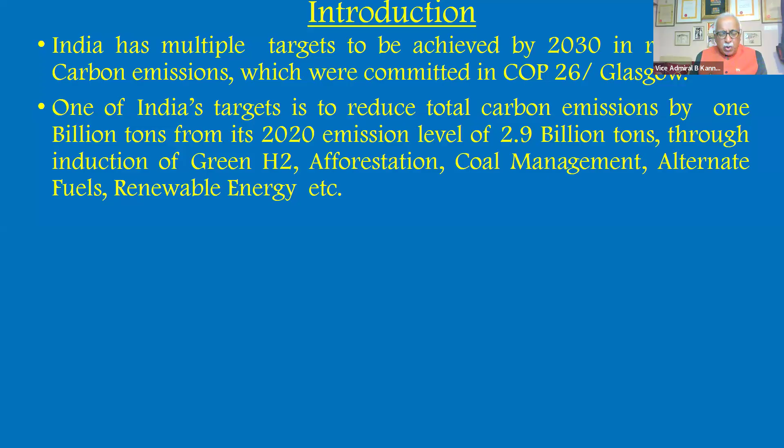The power, industry, and transportation sectors contribute 55%, 25%, and 14% of India's carbon emissions respectively. Power is the maximum at 55%, then comes industry, then transportation. And coal is the major cause of emission in power and industries, not for transportation.

There are hardly any trains running on coal now, hardly any ships running on coal now. So coal's adverse impact is on the power sector and industry sector. One of the major polluting industries is iron and steel, which emits 0.25 billion tons of CO2 every year. Similar high values also exist for other industries like cement, fertilizer, refineries, etc., where coal is used. So wherever coal is being used in industry, you have an issue of CO2 emission because you're burning coal.

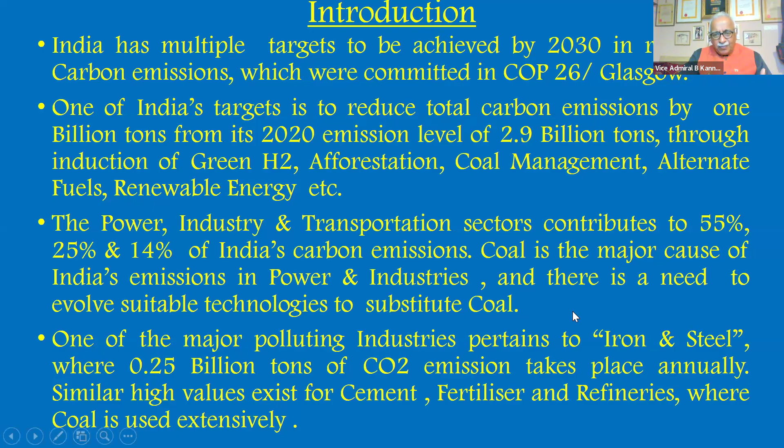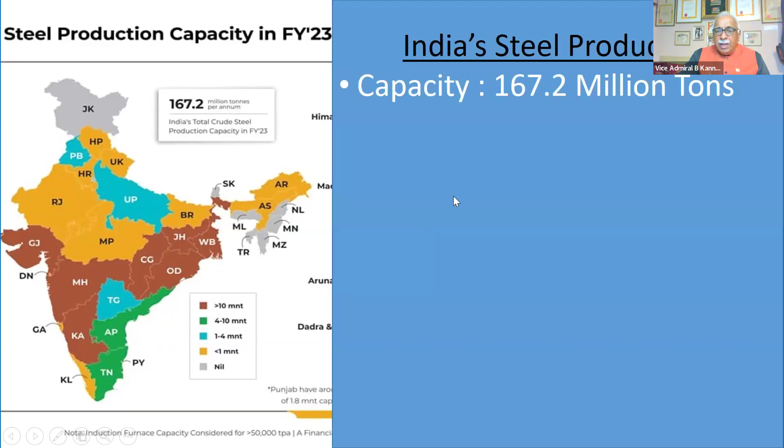And of course, last is gray. We find it's mostly in the central part of India where coal is being utilized maximum for the industries. So for steel production, capacity is 167 million tons, and production last year was 143 million tons. That's close to something like 80 plus percentage.

Private sector is contributing 87% of the production - JSW, Tata's, Mittal, etc. Public sector is only 13%, SAIL, Hindustan Steel. And the world rank for India is number 2, but we are producing only 7.5% of world steel.

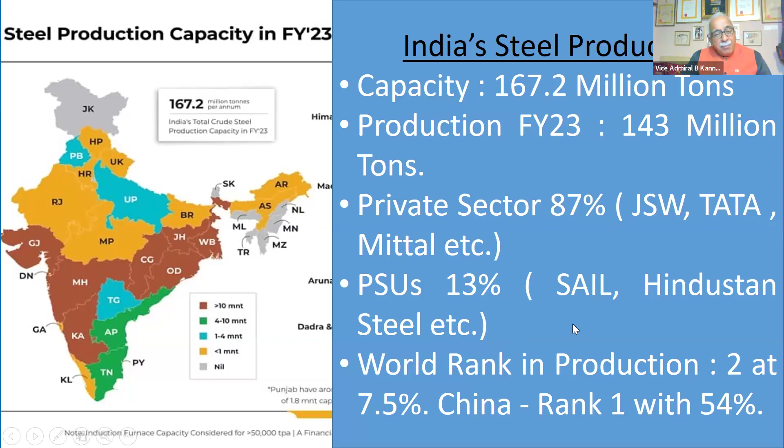China is in rank 1 with 54% of world steel production. They also have lots of carbon emission problems, we'll see in the next slide. But the fact is, they have monopoly over steel production in the world.

So I'm going to show you a little bit of metallurgy combined with some physics. Let's see that. Steel is produced in 2 manners - one is the red circle and the other is the yellow circle. I will explain that very briefly now.

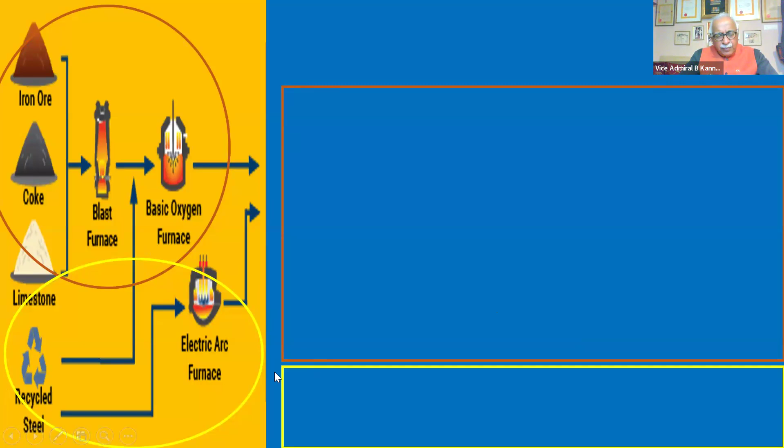In nature, we get steel by extracting it from iron ore. Iron ore is mined from the ground, from coal mines or iron mines, in the form of ferrous oxide, and then we try to get the iron out of it. There's another method, the yellow circle, which is burning scrap steel, collecting it, and recycling it to get steel again. So there are two different ways of doing it.

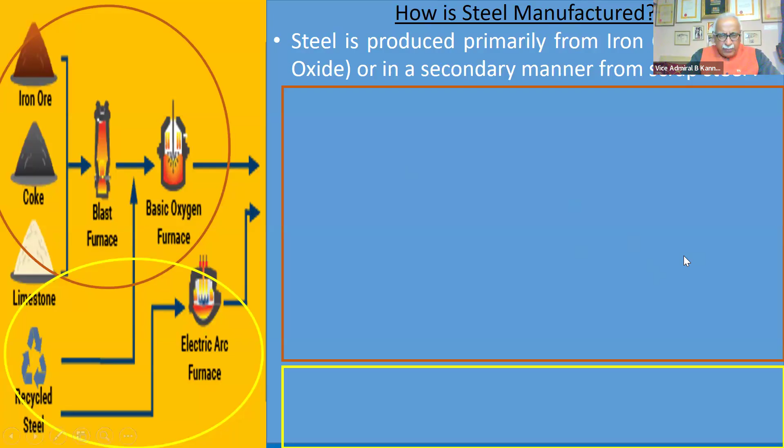Let's go into more details. In the primary method, iron ore and coal or coke are broken down together and fed into a blast furnace. Limestone is also added to help the chemical process, and this blast furnace is fed hot air and oil. That's how the fire is sustained.

Now, in this heat, the iron ore releases oxygen, which combines with the carbon of coal or coke to form CO2, discharged into the atmosphere. So iron ore is split into iron, and oxygen combines with carbon to produce carbon dioxide. I'm putting it very simply. That's how we have a lot of CO2 emission from a steel factory.

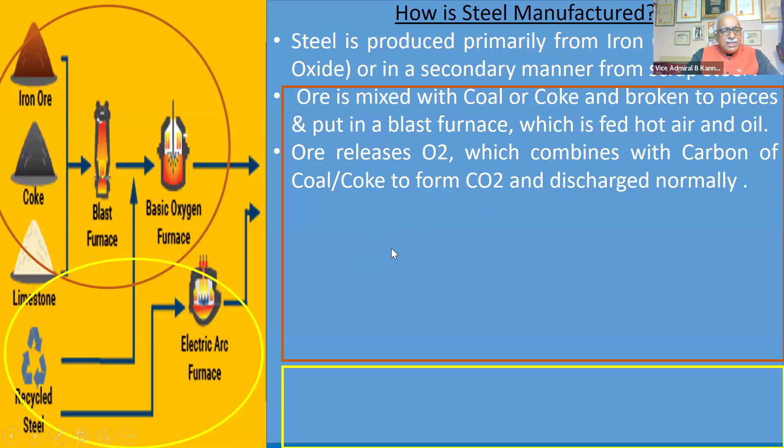This primary method emits nearly 2 tons, about 1.987 tons, of CO2 per ton of steel generated in the steel plant.

The residual part of the ore, after the oxygen is gone, is iron, which is heated once again in another furnace to improve its purity. Then various additives are added for different types of steel—some with tensile strength, some drawable into wire, some flattened to sheet. So different types of steel are available in the market from the factory, and customers want different shapes, so additives are added to manufacture them.

So this is the primary method of making steel: burn iron ore with coal, and iron is left behind while CO2 is emitted. This is the primary method.

Now let's see the secondary method. It's very simple: scrap steel is melted in a furnace, like here in the circle, and purified. That scrap steel melts and then is purified, and less CO2 is emitted, something like 0.35 tons, compared to the first method's nearly 2 tons.

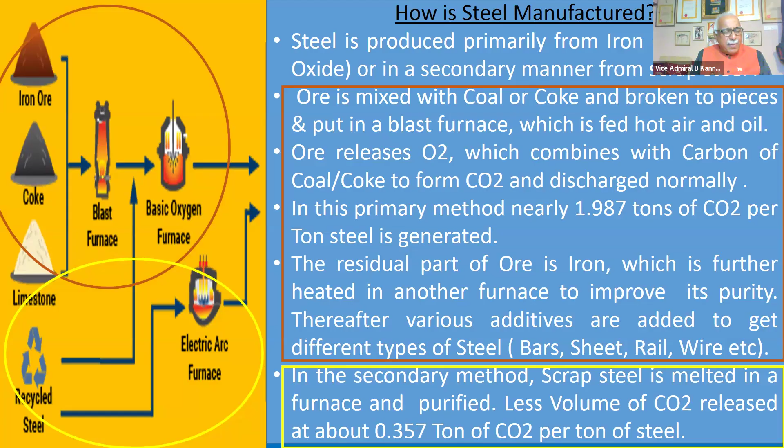So if you can collect scrap steel and reform it into purified steel based on your requirement, you don't emit so much CO2. But then you should have a strong supply chain—able to collect the scrap back, powder it or break it into small pieces, then send it to a factory where they smelt it. So these are, very quickly, the two ways of making steel.

Now, if you look at carbon emission globally, we are around 37 gigatons at this point. China, shown in yellow, is more than 12 and a half, nearly 13. India, in gray, is coming close to 3. The rest is USA, EU, etc.

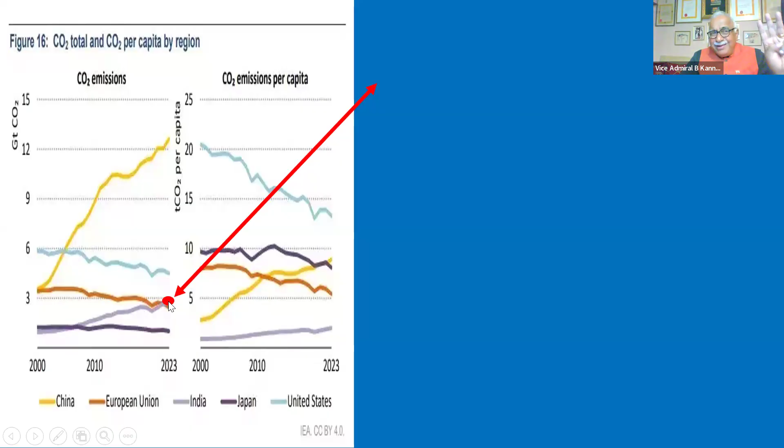The right-hand side shows per capita emissions, but that's not of much importance in this discussion. Looking at total emission, we are very close to 3 gigatons of CO2—gigatons and billion tons are the same unit—which is a little over 8% of the global total.

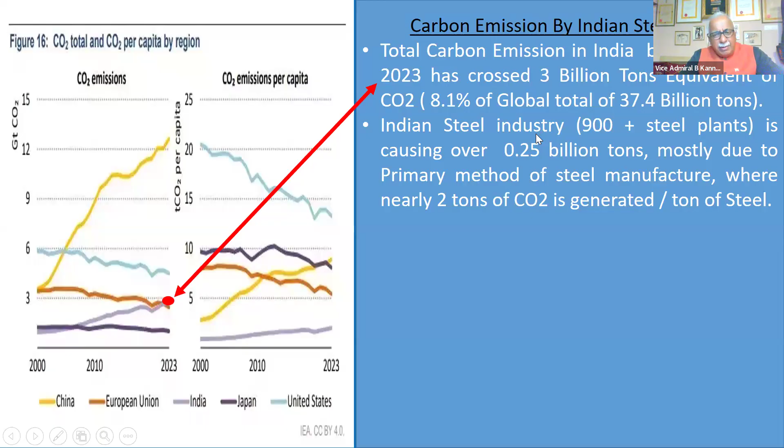Now, India's steel industry has about 900 odd steel plants—some big, some small, some private sector, some public sector. They generate 0.25 billion tons of CO2, meaning 1/12 of our total emission is from steel manufacture, which is around 2 tons of CO2 per ton of steel produced.

Now, if you want to reduce this carbon emission, the industrial process has to change—only then can emissions reduce. So in primary manufacture, we want to avoid coal. Instead, let's use some other method to get iron out of ferrous oxide without producing CO2. That is the aim.

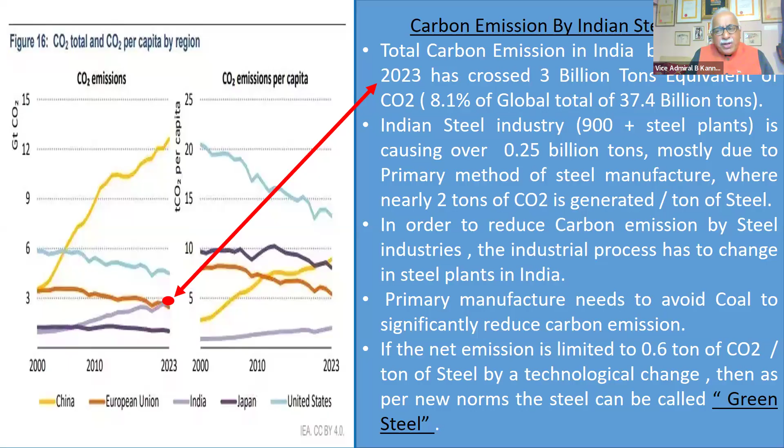If you can reduce net emission from 2 tons per ton of steel to something like 0.6 tons of CO2 in primary manufacture, then as per new international norms, you can call the steel green steel. It's not zero emission, because it's not only carbon emission from the coal furnace, but also emission from power required to run the furnace, blowers, and the factory—power that may come from a thermal plant. So on average it comes to around 0.6. But if you can get anything less than 0.6, you can call yourself green steel.

So let us look at what is green steel.

So there's a furnace - repeating the conventional process. Broken coal and iron ore are put into the furnace, with hot air and oil coming in. Inside the furnace, in this heat, the iron ore is broken down and you get iron, and carbon from the coal combines with oxygen from the iron ore to become CO2. This black smoke which comes out of the steel factory is our problem.

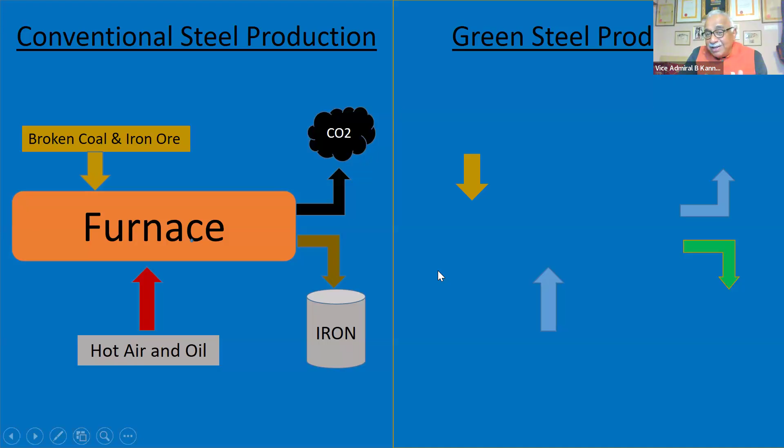We want to reduce this. So let us look at what happens in green steel - this is the technological change. I have simplified it, but let us quickly see. There's a furnace, similar type of furnace - I'm not saying it's identical, but a similar type is there.

Here, only broken iron ore is given, no coal. Earlier it was coal plus iron ore, now only iron ore. And hot air we were giving earlier, now we give hydrogen. So when we give this inside the furnace with iron ore and hydrogen, in this heat, the iron ore, which is ferrous oxide, splits into oxygen and iron. The oxygen combines with hydrogen to form H2O, water. And you get green iron, which becomes green steel after it is purified and some additives are added.

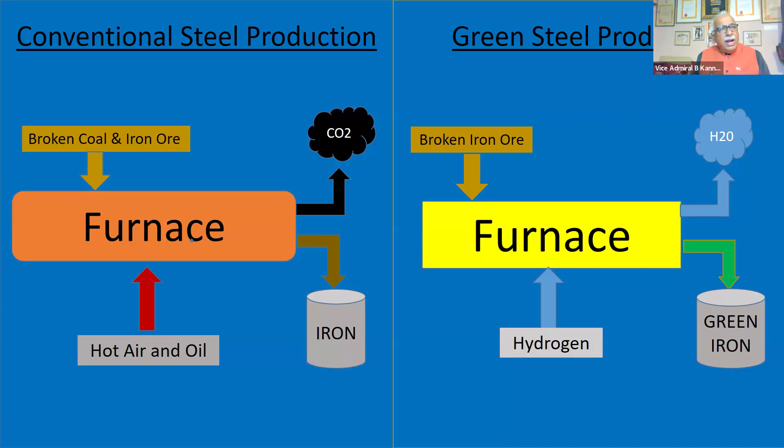So when you want green steel production, there's no carbon dioxide, it's H2O. But why? Because we are introducing hydrogen. How can you introduce hydrogen? Hydrogen is not available in the atmosphere in large quantity - where will you get it from? You can't bring it in a cylinder and feed the furnace; the furnace requires large quantities of hydrogen. How to get it is the issue.

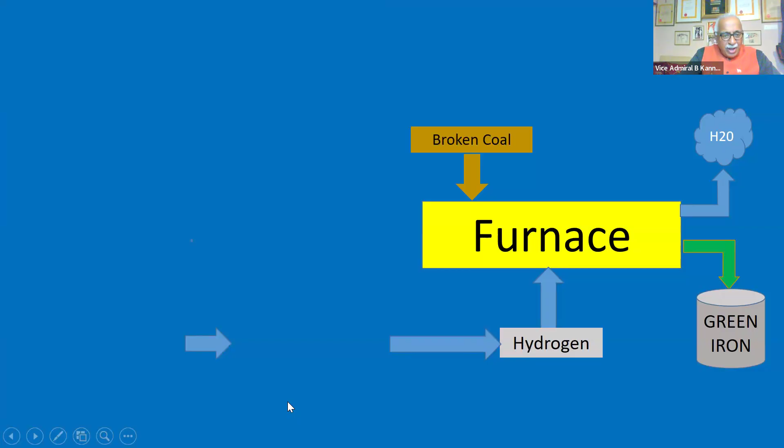So let's see the next slide. You have this green steel production setup - hydrogen has to come from somewhere. So you have an electrolysis plant, a separate factory which will split water into hydrogen and oxygen. You take away the oxygen and give it for whatever use is required in other industries. And this electrolysis plant will supply hydrogen to the furnace, helping this conversion of ferrous oxide into iron and H2O.

That means you have to set up an electrolysis plant very close to the factory - it can't be even 5 kilometers away. I'll tell you why: hydrogen is a very light gas, very voluminous. It cannot be put in cylinders and brought - you would require thousands of cylinders. So it is normally brought under pressure through a pipeline from the electrolysis plant. So we set up an electrolysis plant 2-3 kilometers away and do it.

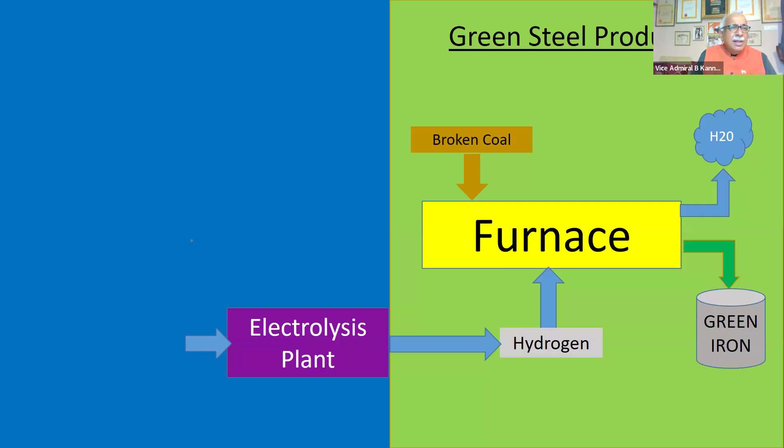But electrolysis plants require power - how will you operate it? If that power is coming from a power plant burning coal, then you're not actually reducing carbon emission. That electrolysis plant should work on power which doesn't involve coal - it can come from a nuclear power plant, a windmill, or a solar panel or solar farm. So you set up another solar farm or wind farm to feed the electrolysis plant, which means the steel factory requires additional land to set up the electrolysis plant and the windmill or solar farm.

So that the energy coming here is not related to coal - no fossil fuel, no diesel, no petrol, no coal. So the electrolysis plant gets pure green energy and gives hydrogen, and therefore you call this hydrogen green hydrogen, because it's coming from an electrolysis plant fed with green energy. If you feed energy from a thermal power plant burning coal, the electrolysis plant will still work, but the hydrogen will not be green - it will be black hydrogen. If you feed from a nuclear power plant, it will be purple hydrogen. We have discussed this earlier.

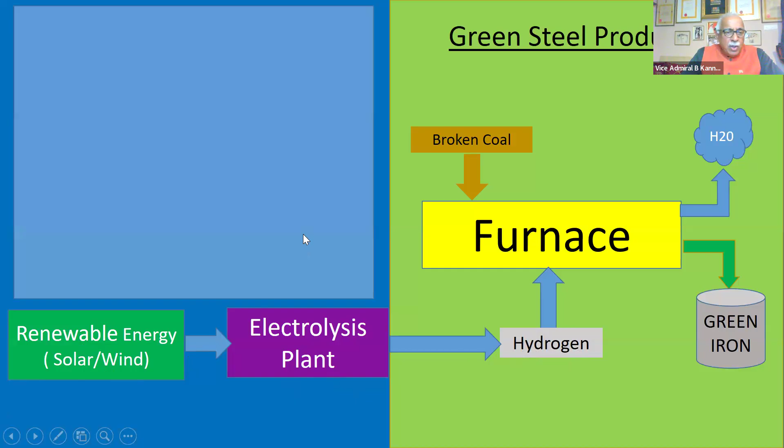So let's come back to this. You require space for these two additional setups in the steel plant. So the steel plant requires capital investment - an electrolysis plant, renewable energy, or you can take renewable energy from a green grid, as we discussed some time back. They are trying to run a separate grid with only green energy so it can be given to industries. You require additional land also sometimes. So the cost of green steel will be higher because of this, apart from some modification required on the existing furnace. But carbon emission can be reduced.

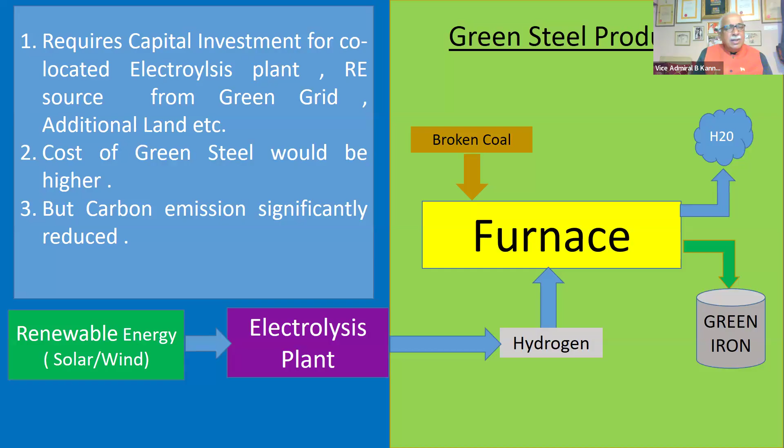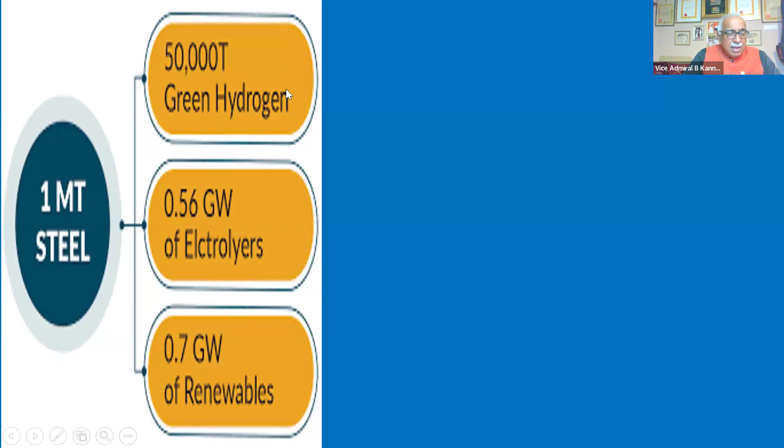So the first technology is to do away with coal, get hydrogen, put up an electrolysis plant with a renewable energy source, and you will have less carbon emission. Now, for 1 million tons of green steel, you require 50,000 tons of green hydrogen. And green hydrogen is light, so you can imagine the volume required. You require so many gigawatts of power for running the electrolysis plant, meaning you should have a solar farm or wind farm or power from the green grid giving at least 0.7 gigawatts of energy. So it's a huge amount of energy required to produce the hydrogen which goes into formation of steel.

So green steel, we can have less than 0.6 ton. This is the present internationally accepted norm, but there's no standard still defined internationally. What is green steel? It's not green color, definitely not green color. It is the way the steel is manufactured using green hydrogen. Hydrogen also has no green color because the energy it uses is green. That's why it's called green hydrogen, and therefore the steel becomes green steel because coal is thrown away and hydrogen comes in, and you're able to manufacture it. That is a major takeaway for you for today, this technology.

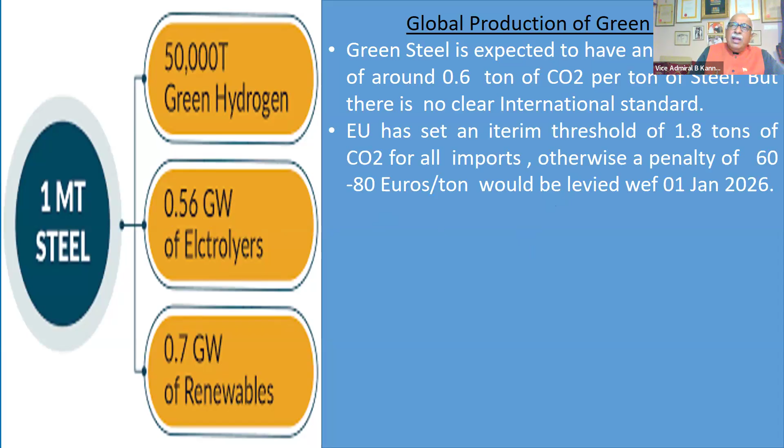EU has said presently an interim threshold of 1.8 tons, that if you have steel produced with less than 1.8 tons, then they'll accept it as import, otherwise they'll levy a penalty. You remember earlier it was 2 tons if you use coal. So they brought down the level slightly to 1.8 for 2026, saying reduce the carbon emission a little bit by improving your manufacturing, and then we will accept imports from other countries, otherwise levy penalty for every ton.

Today, there's only one firm in Austria which produces green steel, only one in the whole world. It uses a 6 gigawatt electrolysis plant. You see on the left, 1 million tons requires 0.6 gigawatts, but this uses 6 gigawatts, meaning it can produce 10 million tons of steel. So far it's under trials and various improvements are being made. It has only produced 5,000 tons. But commercial operation is going to come from 2030 because the electrolysis plant is to be made, pipelines have to be run with hydrogen, they have to be pressurized, compressors are required, and green energy has to come. So they anticipate another 5 more years before commercial level operation can happen in this factory, the first factory in the world, which has been started in Austria.

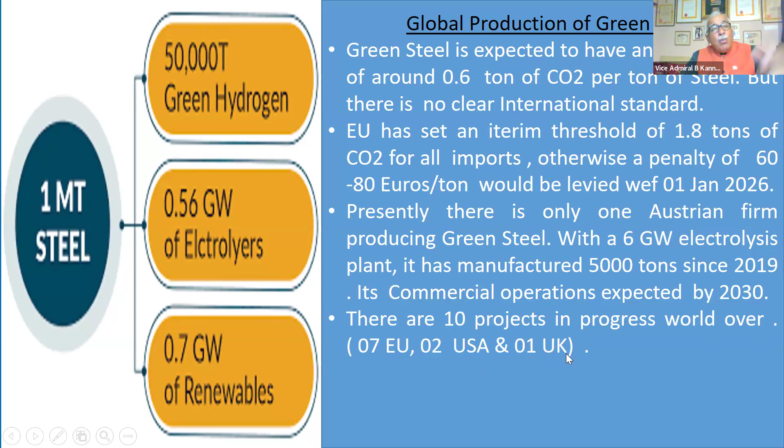There are 10 projects going on in progress in the world. 7 are in Europe, 2 in USA, and 1 in UK, and the one in UK is owned by Tata's. Tata had bought many steel plants in UK, and one of them is doing the conversion to green steel. Indian projects are yet to start, so in India, no green steel is produced on a commercial scale. R&D is going on, experiments are going on, people are trying to see how to produce green steel because that is the requirement of tomorrow.

Definitely, we want to bring down the carbon emission. So there are major Indian companies that have started making green steel production plans - how to do it, how shall we modify it, what is the additional equipment required, where's the land requirement, where's the energy going to come from.

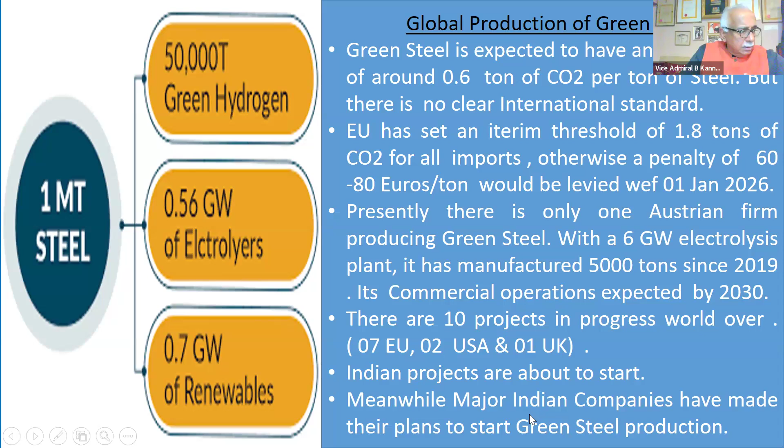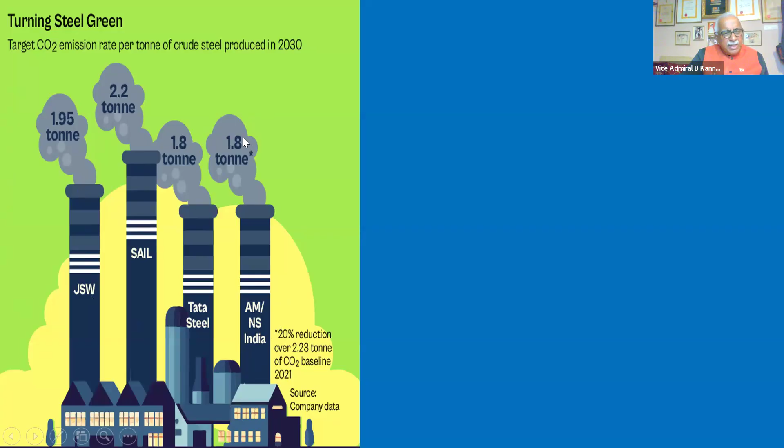Now, let us look at what is the plan of the various private industries as well as public sector in India. JSW, this is Jindal's JSW, wants to reach 1.95 tons per ton by 2030. SAIL, which is public sector, is going to stick to 2.2, slightly reduced from present. Tata wants to bring down to 1.8. ArcelorMittal Nippon Steel, which is a joint venture, wants to reduce to 1.8. So this is the plan of our major steel manufacturers in India - 3 are private sector, 1 is public sector, and they are bringing in some improvements as you can see in the slide.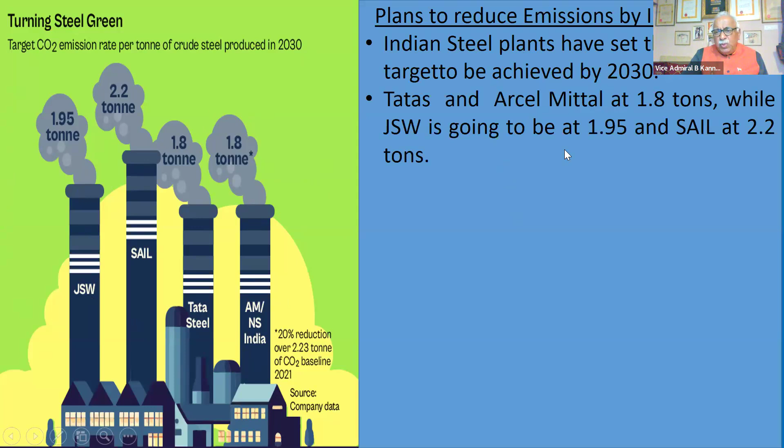They have set their emission targets by all these plans by 2030. Tata's are set at so and so, as I told you, and SAIL is at 2.2 tons. Tata's, in addition, are planning to induct small nuclear reactors. You must have seen in the paper after budget that the government is going to give some money to make small nuclear reactors, which is going to be called Bharat.

They can be part of the steel plant as an extension so that they don't require solar or wind, but they can power the electrolysis plant and the steel plant. Tatas are trying to do this. It will take some years, definitely, and they will be inducting these nuclear power plants.

And if they're going to use this, their hydrogen will not be green. It will be called purple.

Indian coal is not preferred by many steel industries because of high ash content, and therefore they need to be substituted by imported coal, which has got lower emissions. This is another problem with Indian coal. If you use Indian coal and government doesn't allow import, your ash content is high, and CO2 content per ton will also be high.

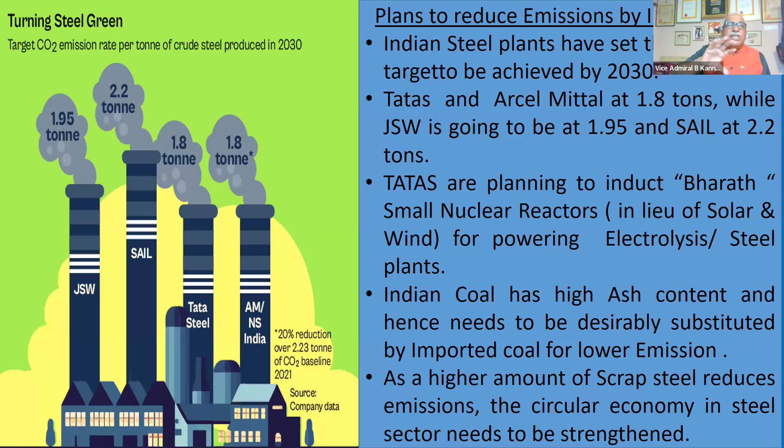So while this is all pertaining to the primary sector, a higher amount of scrap steel, if you can bring through circular economy activities - collect the scrap, break it down to smaller pieces, bring it back to the steel manufacturer who will just recycle the old steel - this is another way of reducing carbon emissions. So two methods: go for green hydrogen, or like Tata saying, go for purple hydrogen, or shift to more collecting scrap.

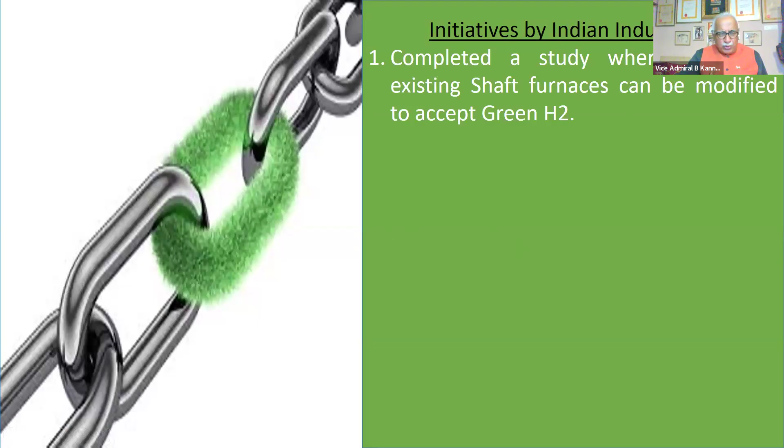Let us see how our Indian companies are doing it. They have completed their study and feel about 30% of existing furnaces can be reused to accept green hydrogen with small modifications. Kalyani Group, in Pune, has utilized an existing electric furnace to demonstrate green steel production called Kalyani Ferresta using scrap steel. So they have gone to the secondary method of manufacture and modified existing infrastructure to produce green steel. It's only a demonstration, not commercial level.

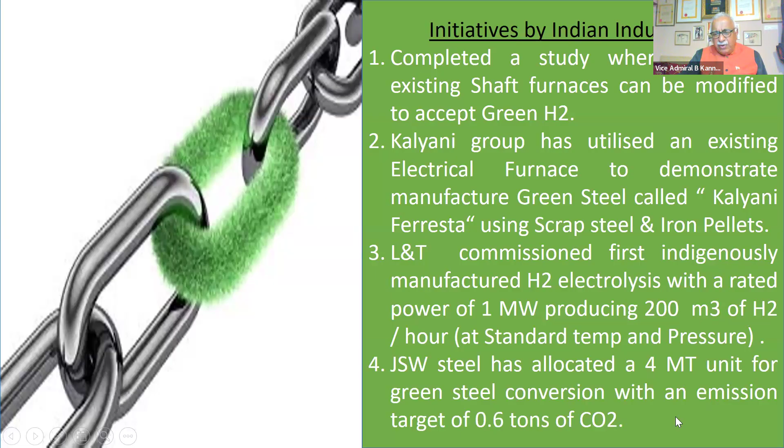L&T has commissioned the first indigenously manufactured electrolysis plant with a rated power of 1 megawatt. Remember, you require nearly 0.6 gigawatts, that is 600 megawatts, for 1 million ton. So this is only an initial, first indigenously manufactured plant. They are getting about 200 cubic meters of hydrogen per hour. They are trying to manufacture and utilize it for steel plants - they will make the electrolysis plant and give it. And JSW has allocated a 4 MT unit for green steel conversion with an emission target of 0.6.

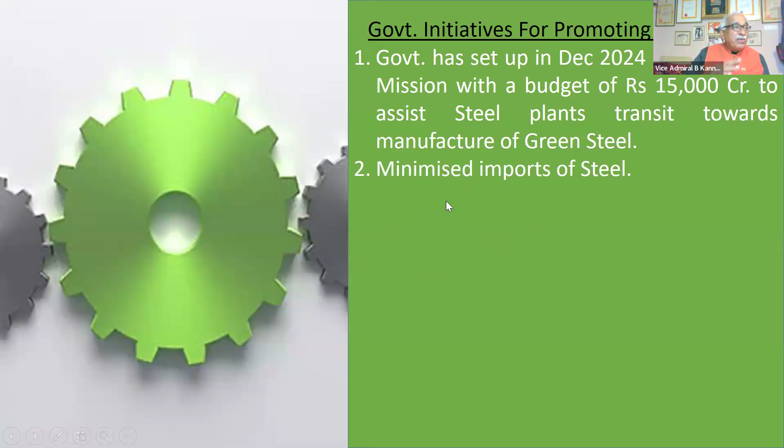So let us see what further is happening in India. Government has set up a green steel mission with a budget of 15,000 crores to assist steel plants so they can be loaned for electrolysis plants or for getting energy from the grid, etc., and to minimize the import of steel. That means use as much Indian steel within the country, because many don't clear the threshold kept, and they will get into penalty. So don't import, utilize our own steel within the country.

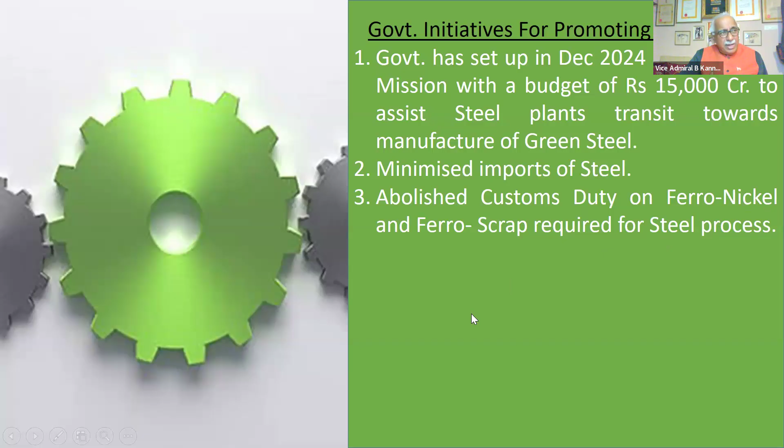Customs duty on two items required for the steel process has been abolished by government in the last budget. Safety guidelines have been revised. Import of low ash content coal is permitted now, because you want to go to green steel. So this is another initiative which the government has taken.

And they have evolved a steel taxonomy based on emission rate. If you are less than 1.6, 5-star. Otherwise, between so and so, 4-star, 3-star, and no rating if you are more than 2.2. For the first time in the world, some standards have been evolved by the Indian government for rating steel as 4-star, 5-star, or 3-star, depending on the emission rate in the factory. That means an agency will monitor the emissions and decide what grading should be given to the product coming out of that factory.

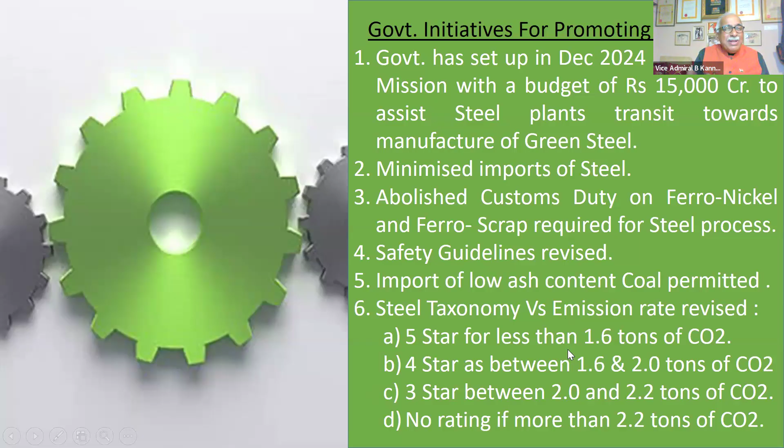So these are the changes which are going to happen in the next 4 or 5 years. We should soon be having company after company, JSW or Tata's or SAIL, coming out with green steel. But what I told you is what is important - their manufacturing process is being tweaked to accept hydrogen instead of burning coal.

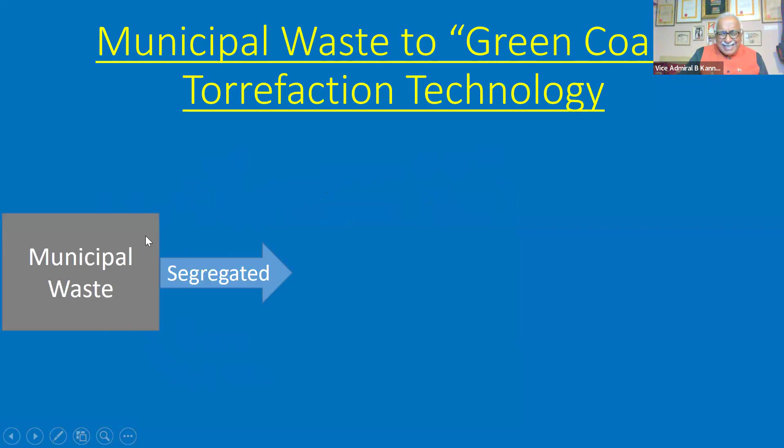So let's go to the next technology called green coal. This coal is again not green in color. It converts municipal waste, which is segregated - that means you remove the plastic and items which cannot be burned, but items which can be burned, like vegetable waste, wood items, or paper, etc. All those things can be waste which can be burned. You segregate them, and you do a technology called torrefaction.

Many of you must be seeing this word for the first time. That means you do the combustion of this waste in an oxygen deficient condition - you put them in a furnace and make sure no oxygen, or very little oxygen, is permitted to enter the chamber. This is called torrefaction, and it will make sure that this municipal waste is converted to charcoal.

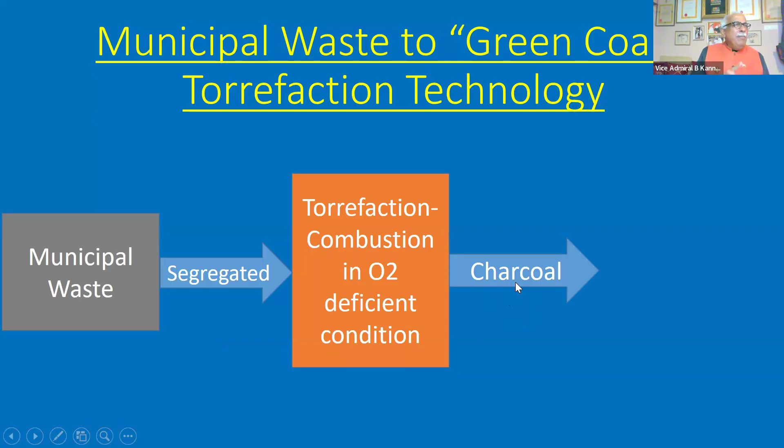You remember the people who used to press your clothes? He used to make charcoal in front of his shop by burning wood, and then cover it in such a way that it doesn't get burned out fully, but remains as black pieces which you can recover and use for his press.

That is similar to something here, but here it's a big chamber where you have this torrefaction, convert to coal, and that coal is mixed with some binder and pellets are formed, and that is called green coal. It doesn't look green, it looks black only, just like what the Dhobi has got in his shop. So this is the technology.

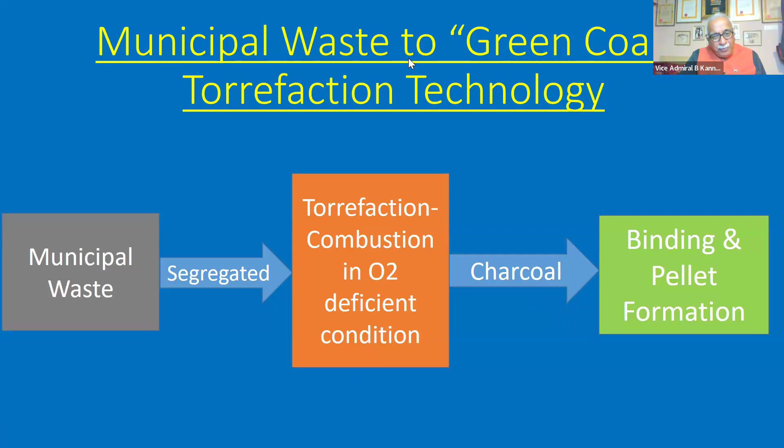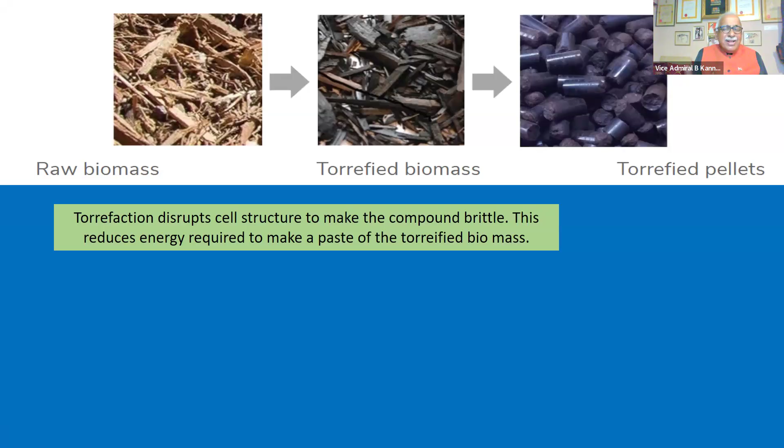Now let us see where we are in India. So this is the biomass, raw biomass after segregation. This is the torrefied biomass, and this is how the pellets look. Many barbecue stands use this, many old type of presses use this, and there are many other ovens and furnaces which use these types of pellets.

So you first dry it. When you dry it, all the moisture goes away and the weight of the biomass reduces. Then this dried biomass undergoes torrefaction when it's under heat in the furnace. In the furnace, some more volatile things burn away, some of the hemicellulose will burn away, some of the volatiles will disappear, and the moisture also will go away. So the weight comes down, and what is remaining is like charcoal.

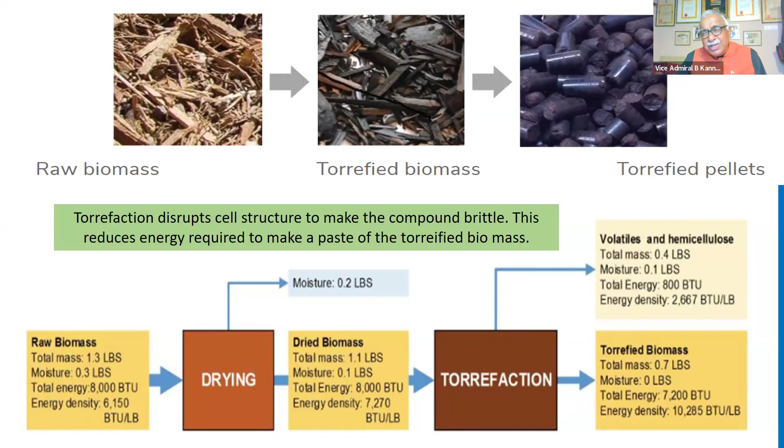In the West, it's called biochar. Biological charcoal is now called biochar. And that mass, those pellets, are used to burn in furnaces where it can be for power generation, it can be for other industry. We will see where are the applications.

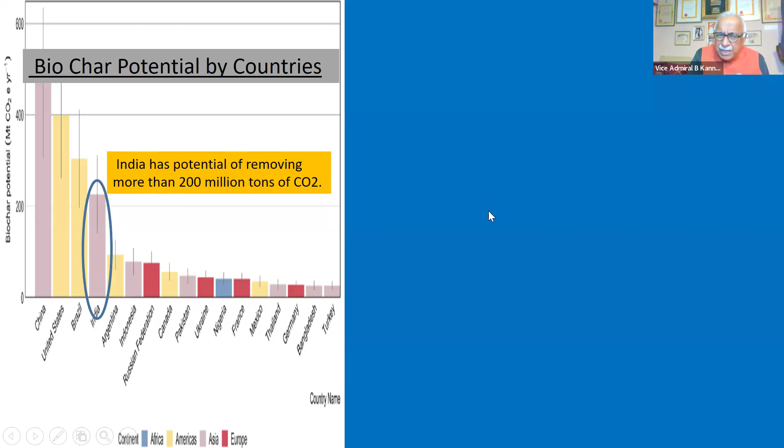So India has got huge potential. More than 200 million tons of CO2 can be removed from our present 0.25 billion, that is 250 million tons. We can remove 200 out of 250 if you can get biochar popularized in the country. That means if you can get all the municipal waste collected and converted to biochar, and that charcoal is used in industry. It need not be only municipal waste, it can be farm waste also. China has got huge potential, Brazil has got huge potential, USA has got potential, India has also got significant potential as per some study, but it's not easy to reach this level.

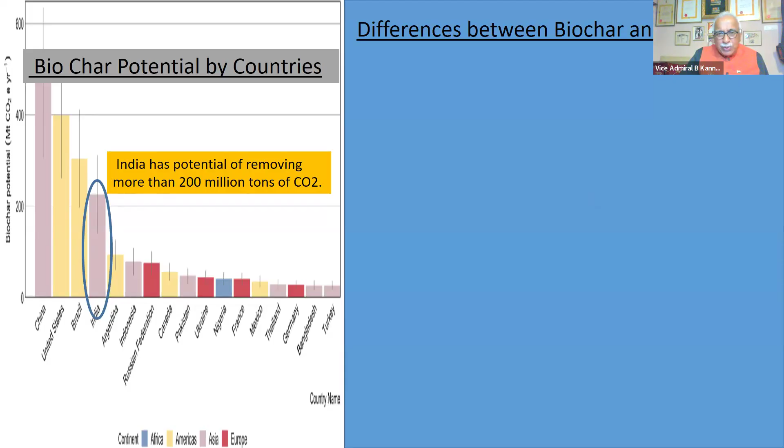So let us look at the differences between biochar and green coal. We talked about two things: one is green coal and one is biochar. The small differences are there. Green coal is produced at a higher temperature, 800 degrees. Biochar is at a lower temperature. Volatile content is higher in biochar, and therefore its calorific value is less. That means you can use biochar only in applications where you don't want too much heat in the industry, which is required only for heating up water, converting into steam, or for some other liquids or chemical process where you don't require very high temperature, like you require in a steel process. Then you go for biochar.

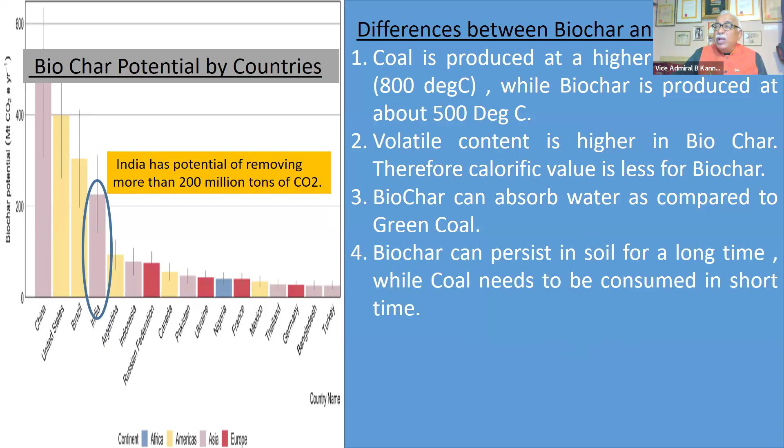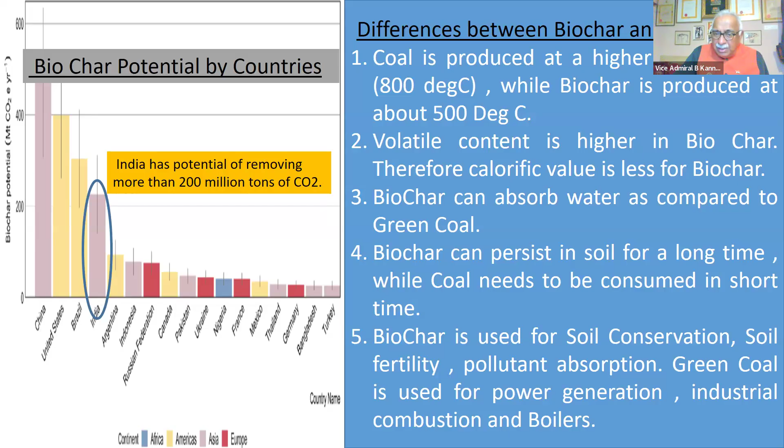Biochar can also absorb water. When you want to cool it down, you can do it with water as compared to coal. Coal is not so easily absorbing the water. Biochar can also be used for soil conservation and when you want to recharge your soil with nutrients. So it is used in soil fertility, pollutant absorption, etc. While green coal, which is produced by converting municipal waste at a high temperature with less oxygen, can be used for power generation, power plants, industrial combustion, boilers, etc. So municipal waste, which is like this, gets converted to green coal.

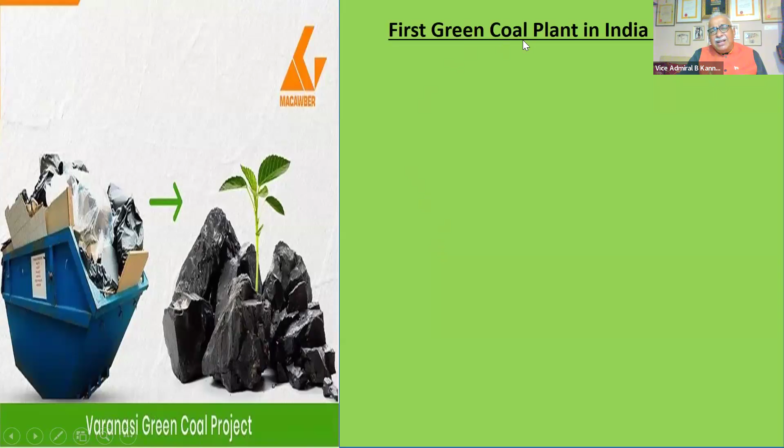So where have you done it? The first green coal plant in India came in Varanasi. It was demonstrated by National Thermal Power Corporation, a PSU, in collaboration with another company, Macawber Bee Kay, at Varanasi in '23, just about 2 years back, where they produced 200 tons a day. After 1 year, they improved the performance and it's about 600 tons a day. I'm sure the problem must be to get municipal waste segregated and brought to that factory. The key technology is torrefaction, which I've already explained to you. NTPC is planning to set up additional plants in Noida, Bhopal, Hubbli, etc., as per the capacity shown there.

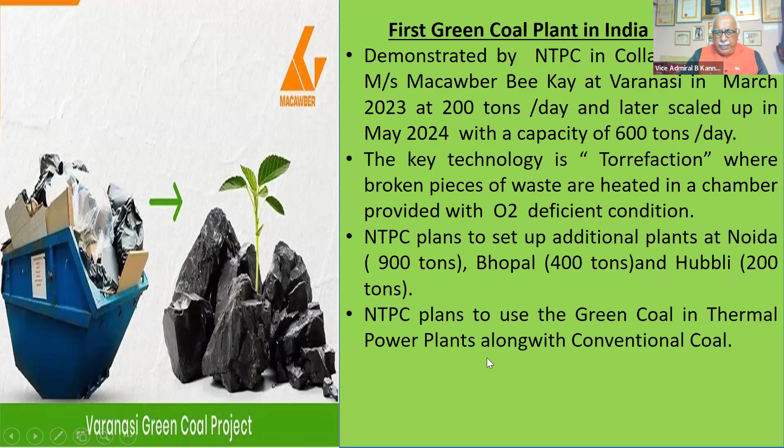NTPC plans to use this green coal in their own thermal plants. NTPC is burning coal today to produce electricity, but after these green coal plants come up, they will use green coal in their own thermal plants. It's still thermal power, but not using fossil fuel coal. They'll be using green coal obtained from biological waste or municipal waste.

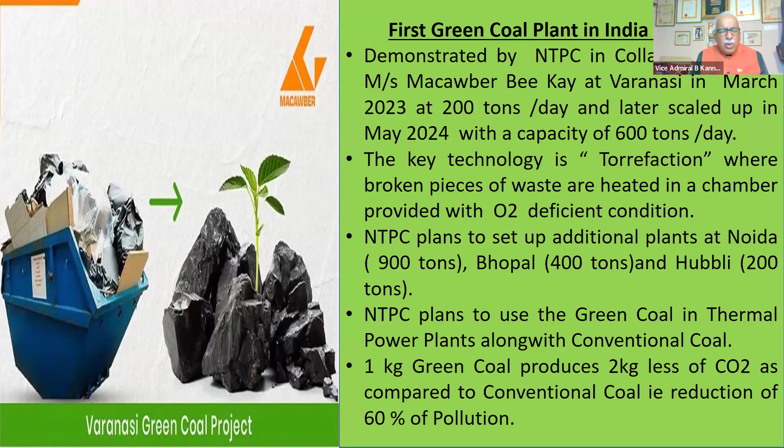1 kg of green coal produces 2 kg less CO2 compared to conventional coal, so there's a reduction of about 60% in pollution if you go for green coal. This is how it looks in a photograph, almost similar to biochar. Now let's look at the merits and demerits of green coal: pollution and smoke are reduced, very clearly, as compared to conventional coal.

Municipal waste can be managed better. Imagine a power plant using conventional coal that has to come from a mine, maybe in Bihar or Chhattisgarh. From there it comes by train, then by truck to your factory or steel plant, and then it's used. But if you're using municipal waste, you can get it collected from one of the new torrefaction plants nearby, which collects municipal waste from nearby areas and utilizes it. So you will have easy logistics for your green coal as compared to conventional coal.

You're also able to manage your municipal waste. Otherwise, where will the municipal waste go? You will just put it in a landfill. The land gets filled, it becomes a hill now, like you've seen in Delhi. So a better management of municipal waste will evolve.

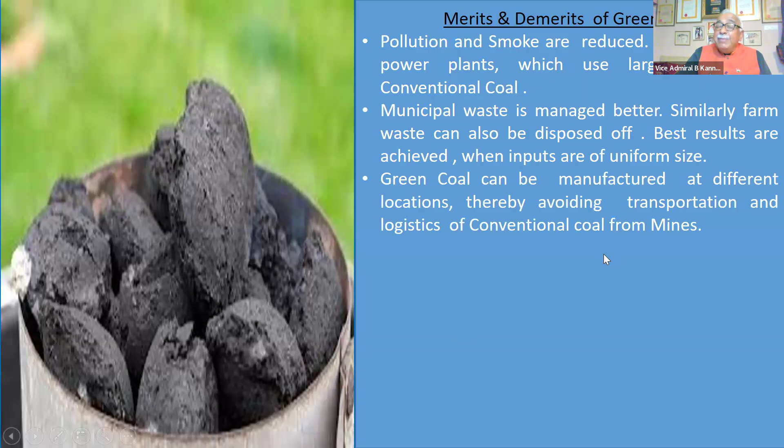It can be set up in different locations depending on where the users are. You may have an aluminium plant, so set up some green coal plants in the nearby towns. You may have a paint factory which requires heating and things like that, so you set up a green coal factory there.

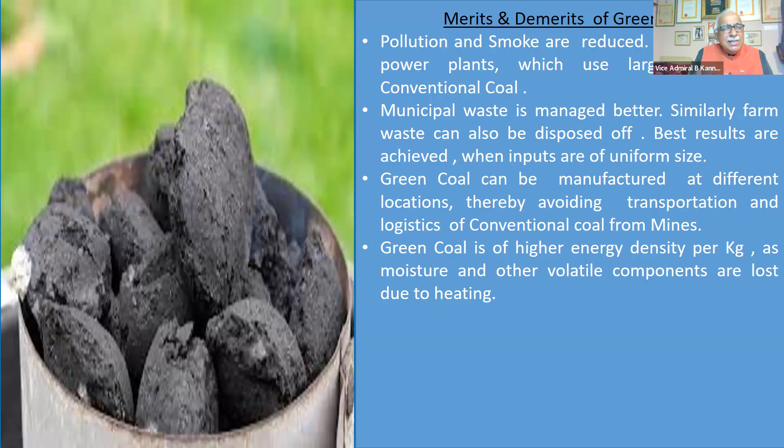So green coal produces higher energy density. I want to clarify this: higher energy density is different from higher calorific value, because all the moisture has gone away, all the volatile items are burned away, the remaining mass is less, and therefore it's higher energy density. That's the reason. But calorific value, as compared to coal, is less.

As I told you, municipal waste, if sent to a landfill, will decompose and produce methane, which adds to greenhouse gas emissions. So municipal waste is better managed locally rather than collecting it all in one place and creating a huge dump yard with waste producing methane. Green coal has got huge potential, not only in energy applications, but also in disposal of municipal waste. Farm waste can also be used.

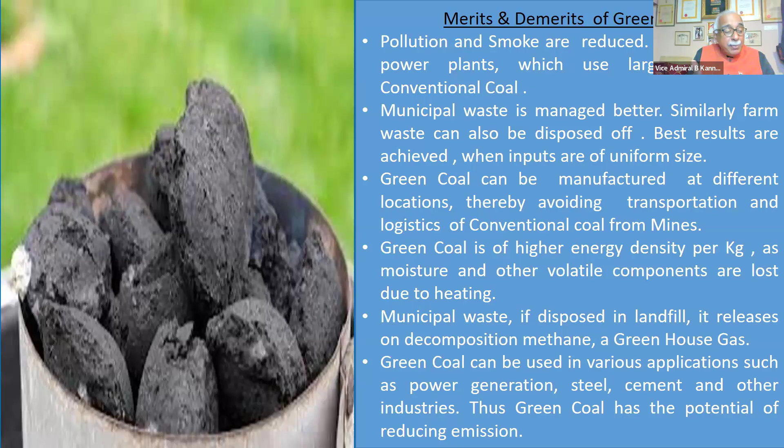So pollution in Delhi, if you use this technique, can be brought down. Collect all the waste and convert it into green coal by having a plant, maybe the Noida plant which is going to come up there by NTPC, will do this.

So let's come to conclusions. Countries are pursuing different technologies so that they can avoid fossil fuel. The difficult solutions are in what's called hard to abate industries: cement, steel, fertilizer, refinery. They all got set up in such a way that they require coal, they're coal hungry. So you have to shake them off from coal and they have to use some other process which is more green.

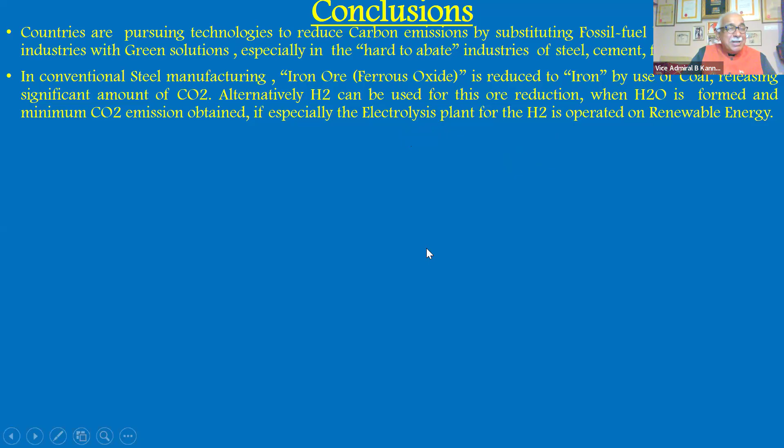In conventional steel manufacturing, when you convert ferrous oxide to iron, it releases CO2. When you bring in H2, hydrogen, then there's minimum CO2 emission, as I told you, because power is still required for other operations. If you can get it from an electrolysis plant, it will be green hydrogen. Otherwise, depending on where the power is coming from, the hydrogen color will be different in its naming. It's only in the terminology, not in the actual color.

The first plant is in Austria, I told you, and it is progressing. For every ton of green steel, 65% carbon emission is reduced, which is very good. So we should try and get this technology as early as possible in the country. Our steel industries are getting ready, and the government has introduced many policies to encourage them.

Productivity linked incentive, electrolysis plant, some additional money. They brought taxonomy so that you know what grade of steel it is, custom duty exemption, so many things they have done recently. As regards green coal, which is made for the first time in the world in India, India is a leader in green coal.

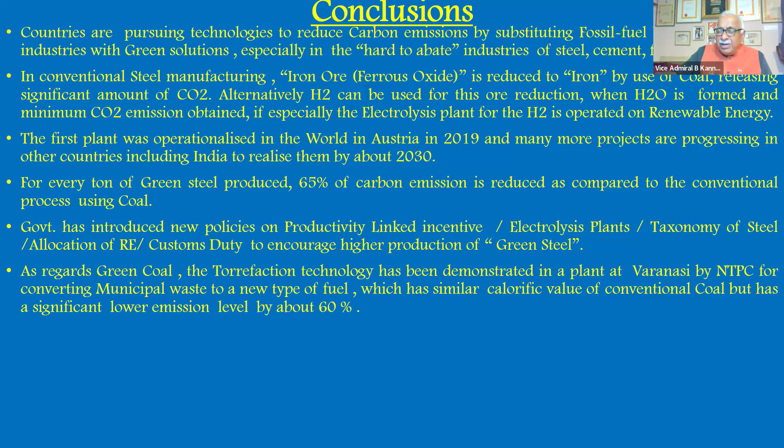The torrefaction technology, which has been demonstrated in a plant in Varanasi, converts municipal waste so it will have a calorific value very similar to conventional coal, slightly lower, but with much reduced CO2 emission levels. So green coal, as I told you, gives not only an energy solution, but also solutions for disposal of municipal waste, avoiding landfill, and even pollution to water, which can happen.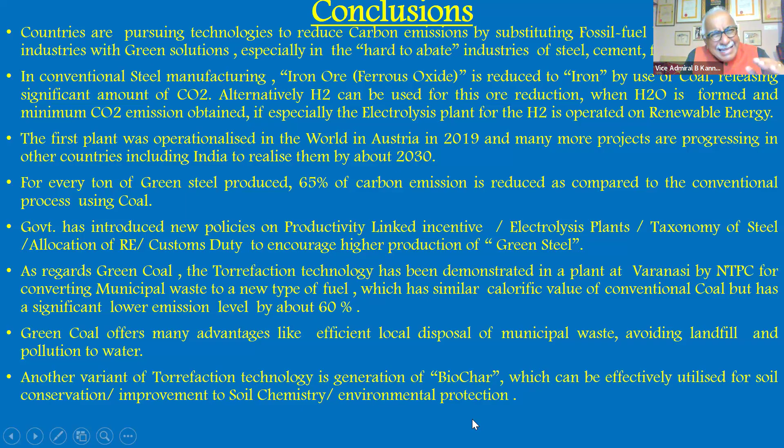There's a variant of torrefaction technology. If you reduce the temperature in the chamber, you'll get biochar-coal or biochar, which can be used for applications requiring less heat, and also for some applications to improve soil fertility, environmental protection, and things like that.

So this torrefaction technology can be used at a higher temperature level for green coal, or a lower temperature level to produce biochar. If we can get these two technologies consolidated in India as early as possible, we will be able to reduce a significant portion of our industry's CO2 emissions, which are currently 250 million tons, or 0.25 billion tons. Our target is 1 billion tons.

But that can be achieved through many ways, not only from industries, but from transport by going to green vehicles, by afforestation which can absorb CO2, by going for alternate fuels. You remember some time back we discussed ethanol blended fuel. When you blend ethanol, CO2 levels are reduced. So many techniques have to be followed.

One of the techniques is inducting green steel and green coal. In inducting green coal, India is the pioneer. For inducting green steel, India is world number 2 in steel production. So we have got huge potential to reduce carbon if you go the green steel way.

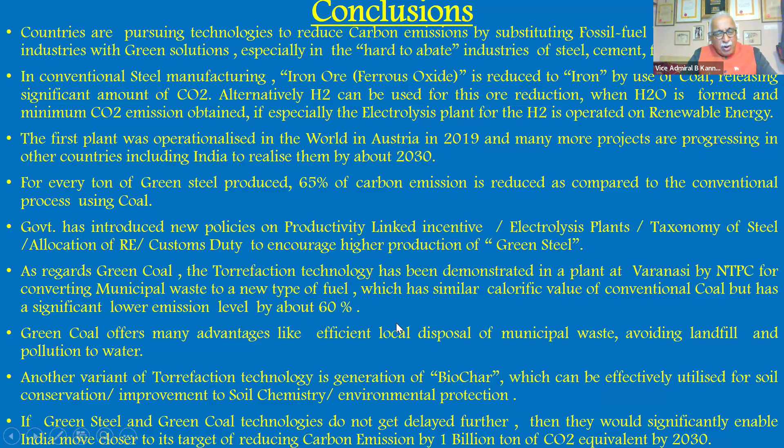With this, I come to the end of my presentation. I've talked about two technologies. Thank you very much. Jai Hind. I'll stop sharing now.

You are giving a very good presentation. It was very prominent, two products, green coal and steel. Very vital for India's future growth.

I was just contemplating why not we use desalination plants. You get sweet water. In Gulf countries they do desalination, so a huge amount of water they make into sweet water, but they need it for domestic use. But in India, if you go for desalination, the hydrogen can be obtained from electrolysis of that water. Then again, the boiler needs some fuel to make this condensation, steam to condense. We are stuck up.

All right, I'll tell you about desalination plants. A desalination plant is working in Chennai for the last 7-8 years. It's called Metro Water. It cannot be used for drinking purposes, right?